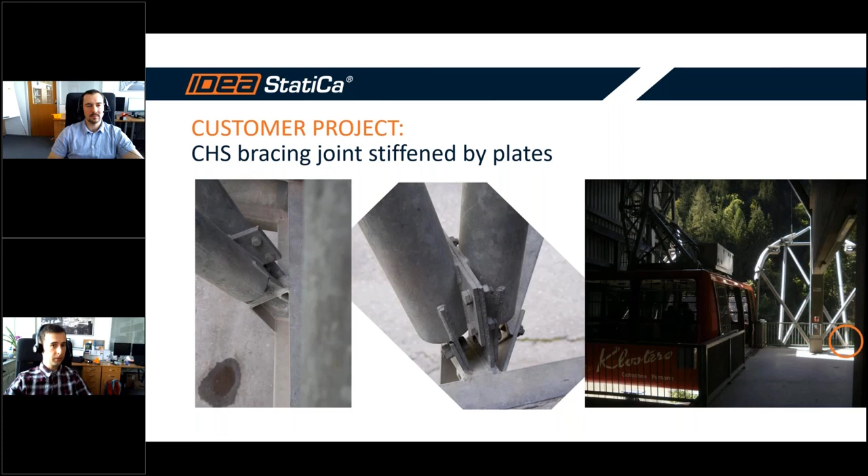Today we prepared for you a really nice example which we found in magnificent Switzerland in a really nice cable car, and it's a circular hollow section joint bracing, and it's really nicely stiffened by the end plates, and it's welded to a really small bracket, and we will go through this joint from scratch in the first part of the webinar. And in the second part, my colleague David will show you two HelpDesk highlights.

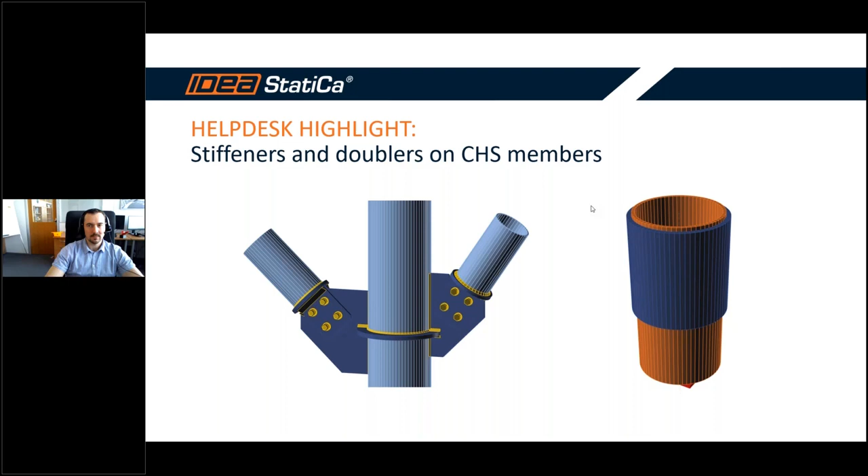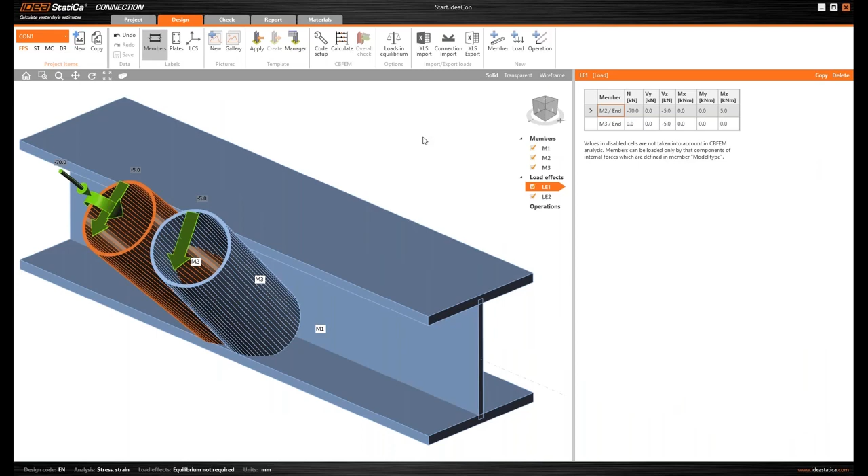So let's jump right into the real example. Let's say we prepared this structure in some finite element analysis tool, and we load it in IDEA StatiCa Connection. So this is our new project. We have members, we have load effects, and we can start the design.

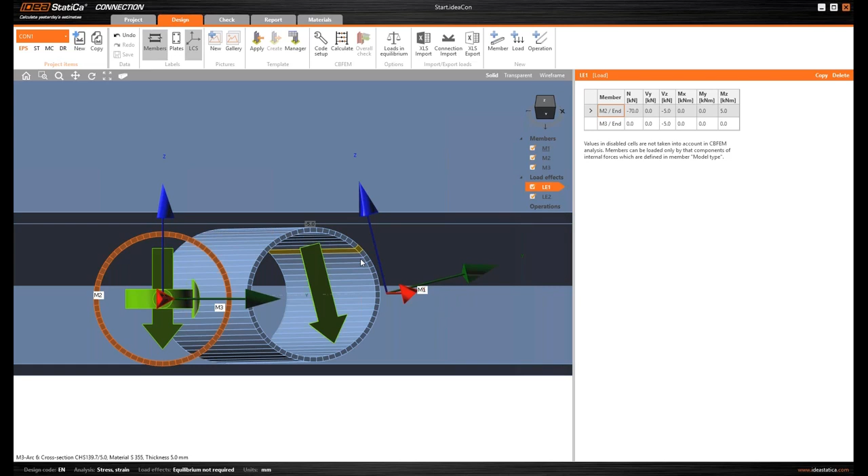For a start, I want to check out the local coordinate system because there is just a small issue. You can see that there are no matches for local coordinate systems of these two pipes. So the first thing I will do is to check out the position of the member M3, and I will just rotate it in a way that my local coordinate systems will be matched. It will make my design easier for the future, and it will also affect the load effects. They are now in one direction.

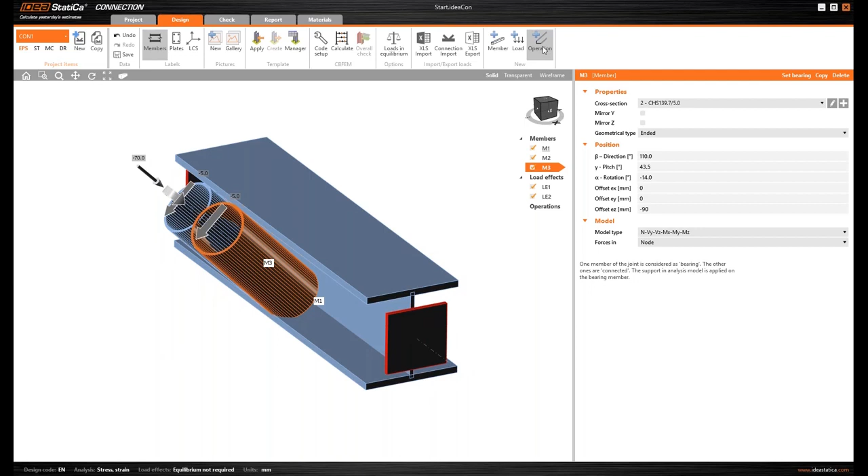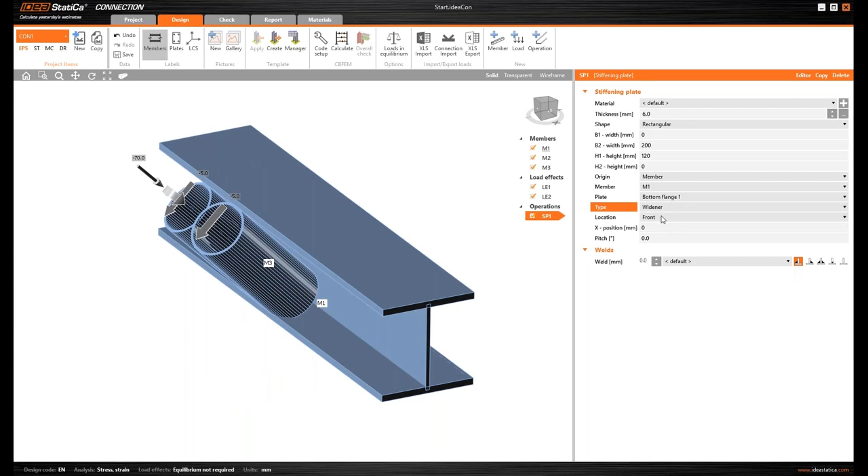So let's start with the design. As you saw from the picture, there is a small bracket which will hold these two pipes, this bracing, and we will create it from general plates. I will start with a small general plate. It will be a thin one, only 6 millimeters, and I will set it to member M1 to the bottom flange. It will be a widener, not a doubler, and if I turn on the transparent view, it's already here.

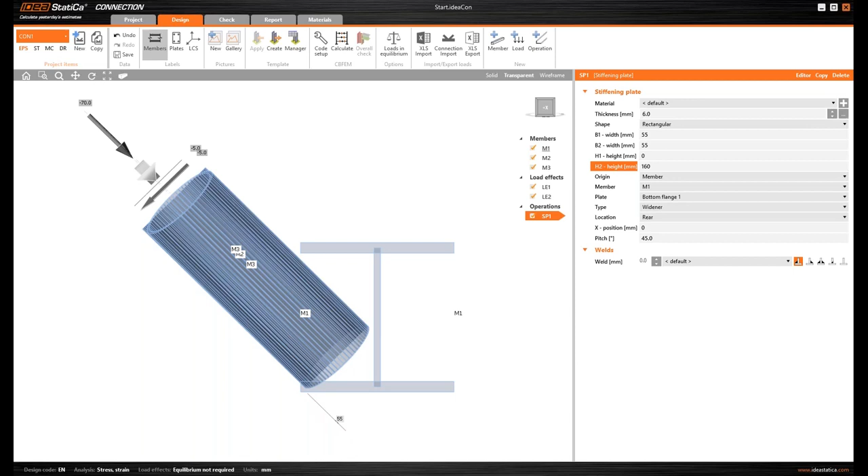Now I will only angle it to the right direction and change the dimensions. It will be here, 0 and 160. And you can see that we started the right way because the alignment is okay. And for now, I will turn off these two pipes just to see the whole work better.

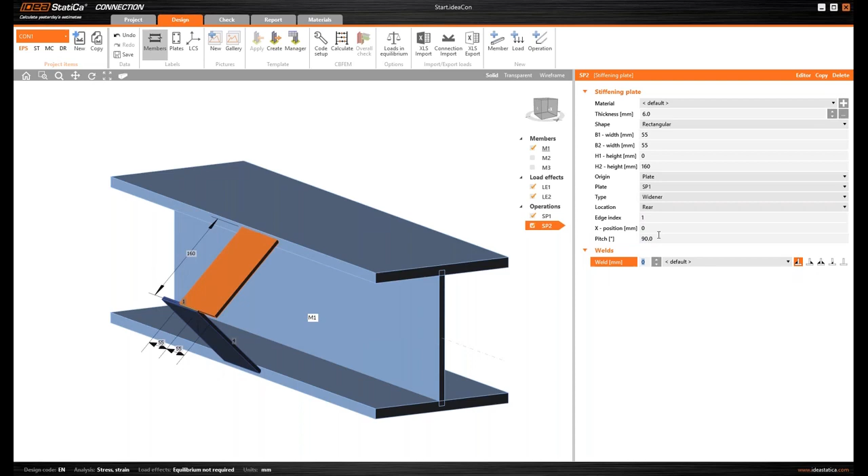Let's continue. I will copy it and assign it to a different plate. It will be not a rib but a widener, and again I will just change the angle, and you can see that I need to shift it to the left, so I will change this position 55 millimeters. Right now we are missing a weld here, so let's add a new weld. Edge to edge will be useful for this, and we will add it to this plate, edge number 1, and to the member M1 top flange, edge number 4, and right here we have it, the yellow one.

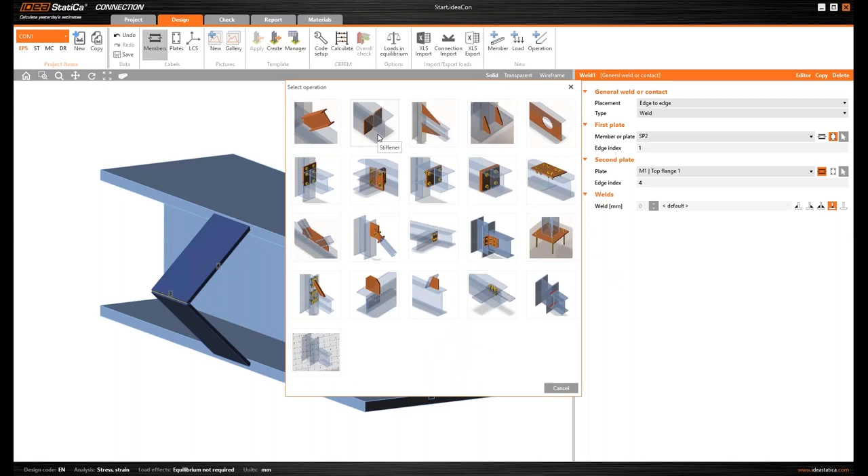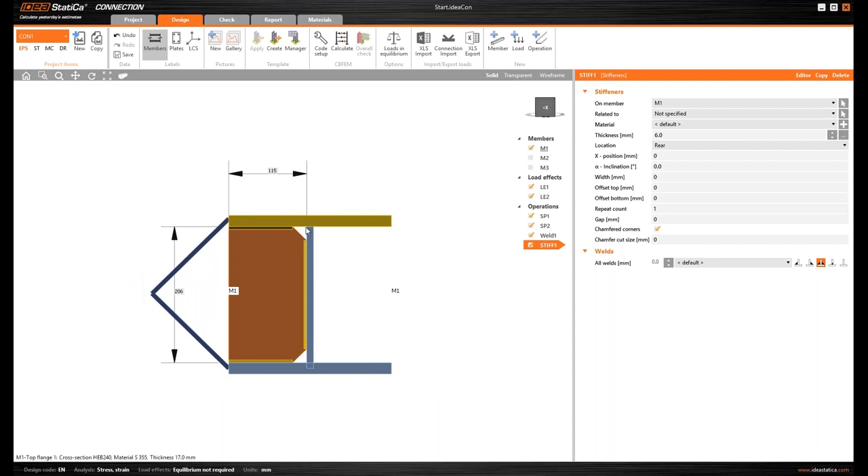So next thing, we want to add a stiffener to the main beam, and the stiffener will be only 6 millimeters thick, and it will be on the rear side. How do you think we can adjust the shape in an easy way? Yes, we can add a general stiffening plate and then cut it from all sides, but I think I can show you a little bit easier way.

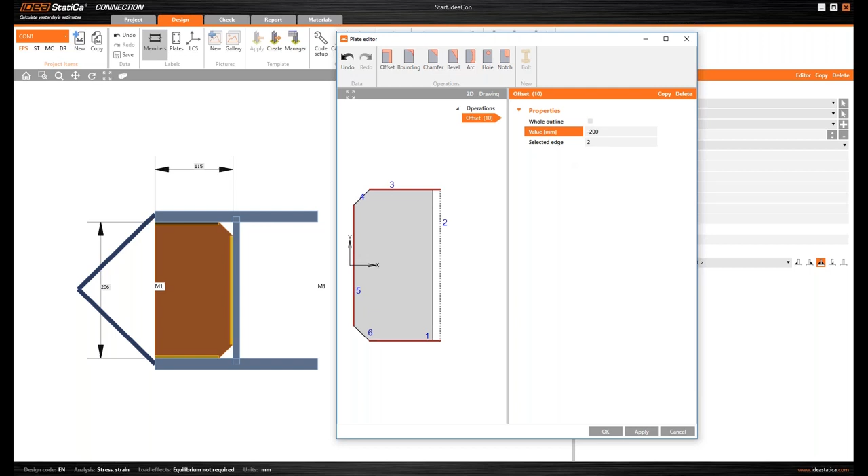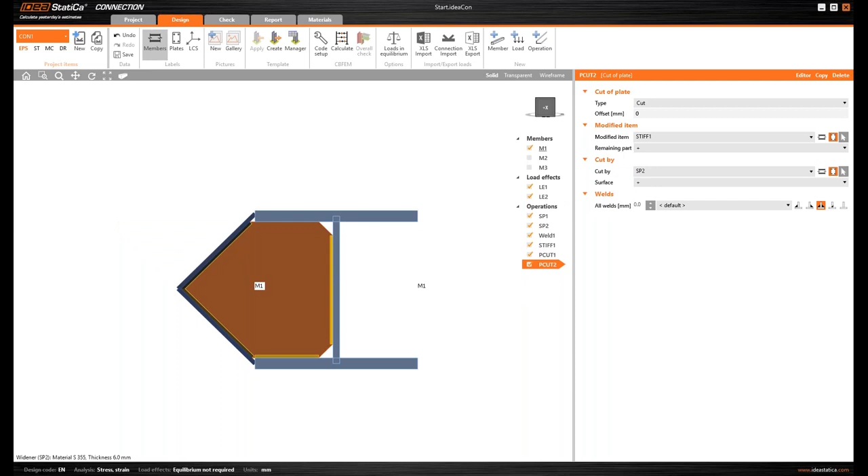Let's go to the editor and change the offset of the plate, but not the whole outline, only one edge, edge number 2. And if we type in a negative offset, we will in fact increase the size. So that's a really nice thing, because we can add material and then just cut it. It will be quick. Great. And just copy this cut and assign it to a different plate. And right now you can see we have almost finished with our bracket.

There is only one weld missing, so just add it again. It will be edge to surface and a different plate, edge number 4, and member M1 top flange. Great. And here we have it, all things together. So that is our bracket, and we can again turn on our bracing tubes. So now it's time to start designing the connecting plate for these two tubes.

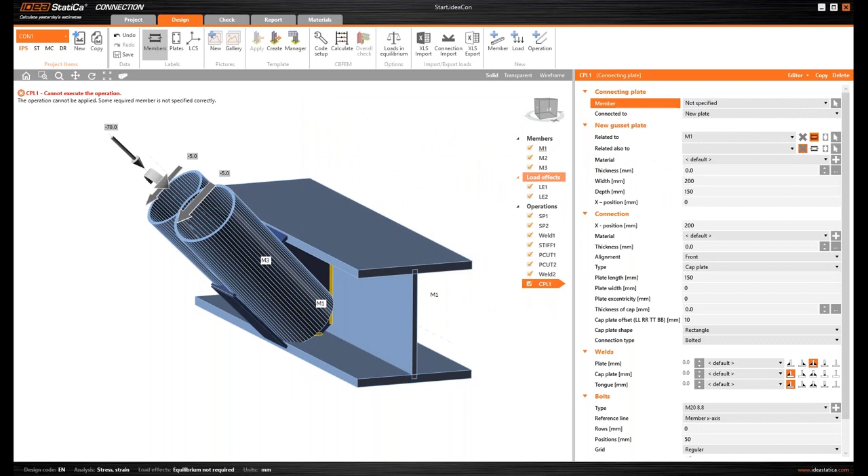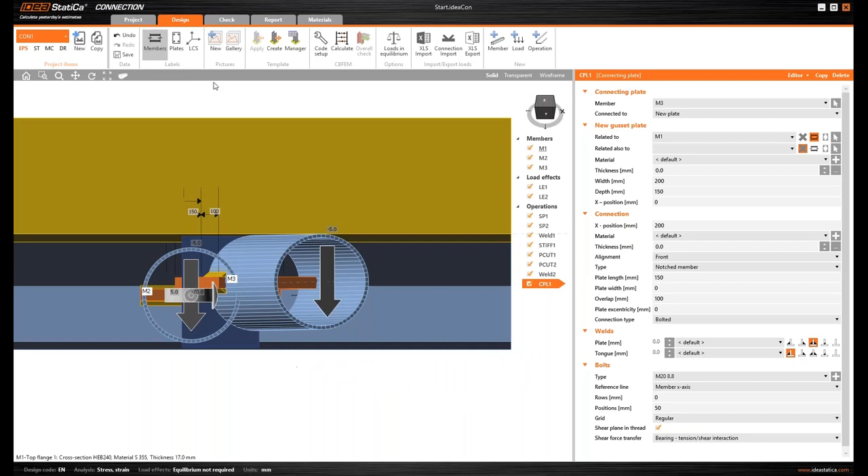So let's add it. Here we have the connecting plate, and we will assign it to member M3 for the start. And let me just change the type of the connecting plate, not to cap plate, but for notched member. That's better. We want to notch the member. And if I turn the view right, just like this, you can see that our connecting plate is aligned with this M1, because this beam M1 is related to this operation.

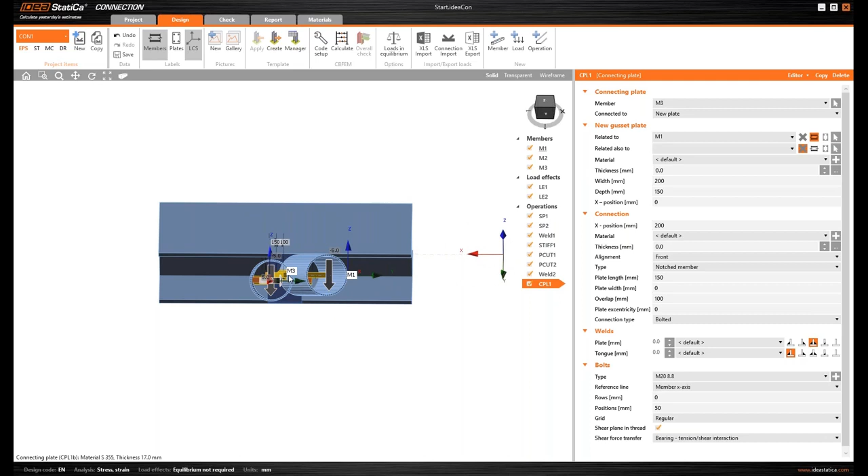And this one, our connecting plate, is aligned with the longitudinal axis of the related beam M1. But I want to change the angle of this connecting plate, and I don't have an option for that here in the parameters. How can I do that? Just easily, I will turn off the relation for member M1.

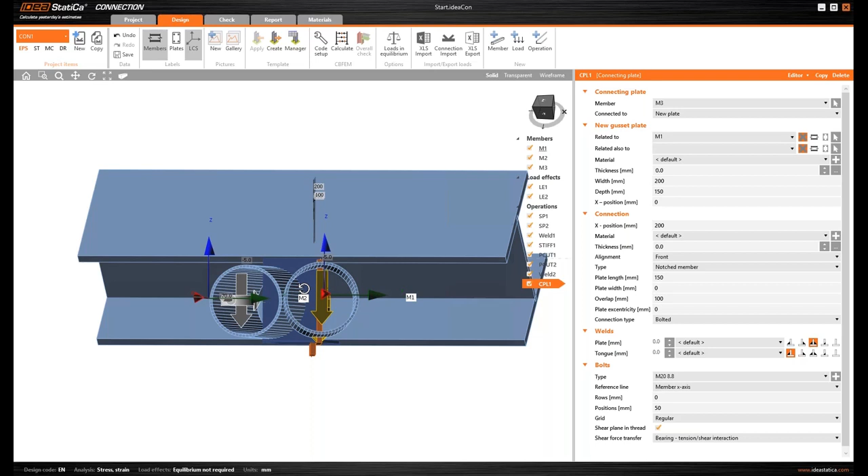Check it out. By turning this off, only one thing remained as a parameter here, M3, the main beam, and you can see that the connecting plate is aligned to one of these axes, which is great. In this position, we wanted to have it. So that's great. Let's turn off the local coordinate systems, and we can proceed with the definition.

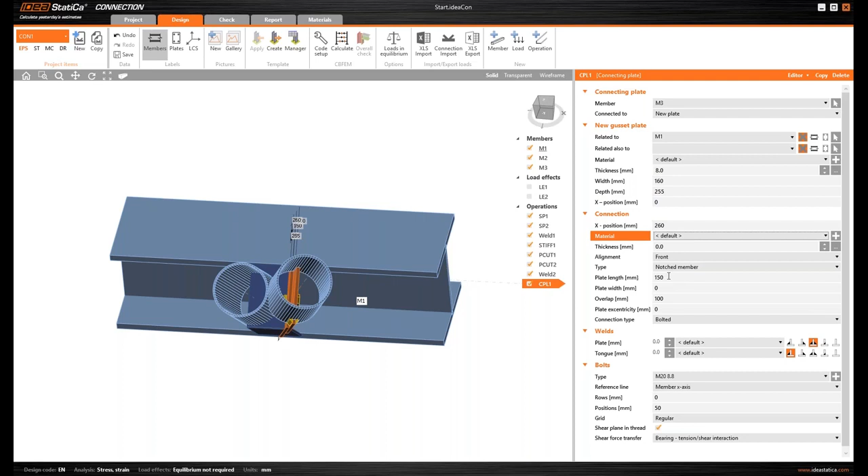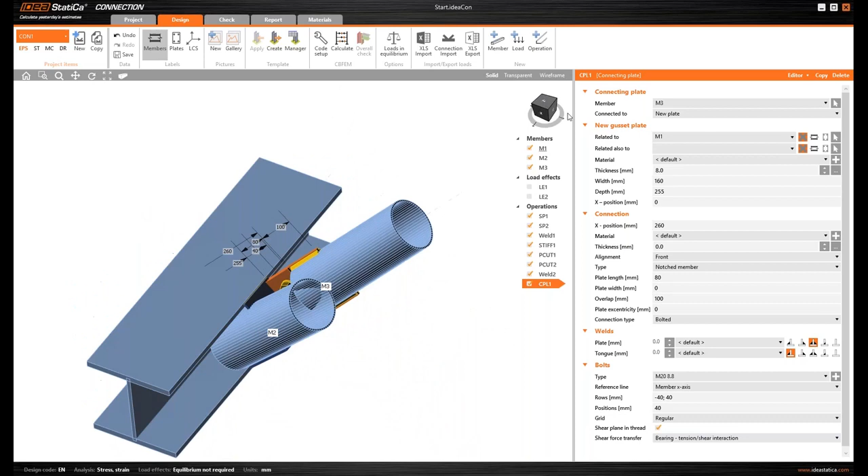It will be 8 millimeters thick, and I will change the dimensions a little bit. Sorry, there will be a semicolon. Great. And you can see I created a really nice connecting plate. So let's copy it and assign it to the other tube.

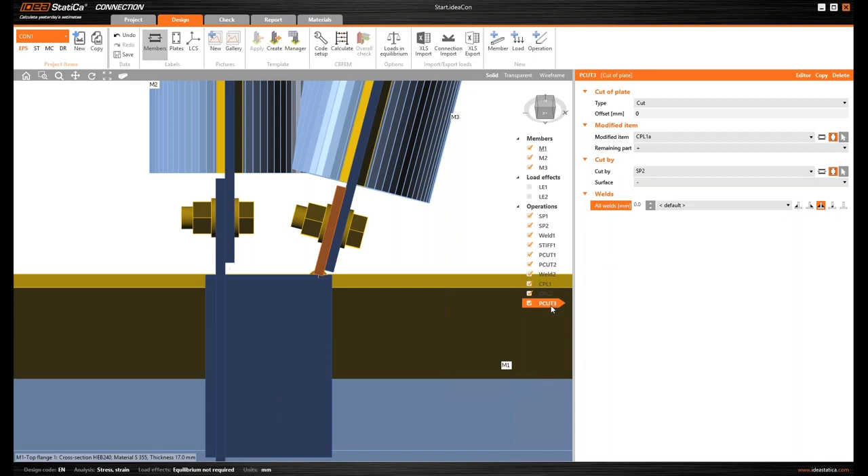And that's it. The only thing that is left is to cut these two plates to connect them. Just one cut, this plate with this plate, and I will change the remaining part. Okay, copy this operation and change the assigned plate. Great. Now I connected it.

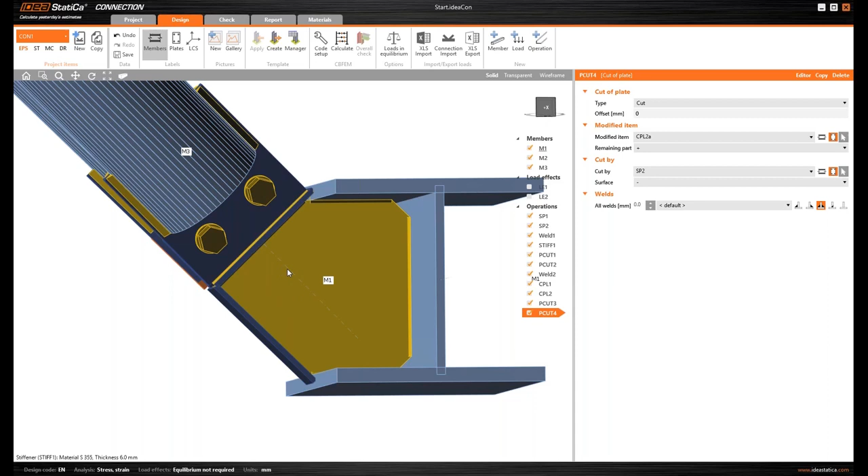And from my engineering point of view, if I push these members down, it will definitely make this stiffener buckle. So I want to insert here a small stiffener too along this axis. So let's start. I will add another operation, another stiffening plate, and it will be only 6 millimeters thick. And I will place it to plate SP2, which is this one.

And it will be a rib, it will be to rear, and it's creating on the other side. So just rotating the view, and I need to shift it a little bit, let's say minus 120 millimeters, and adjust the dimensions a little bit. That's great. Let's cut it again.

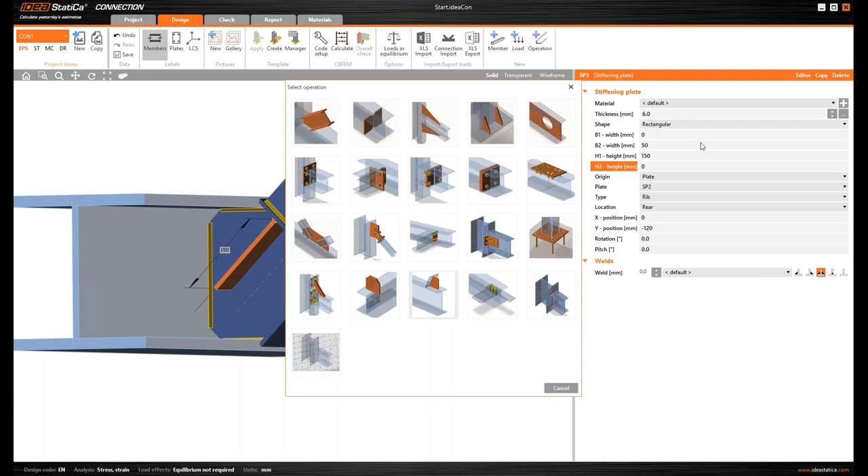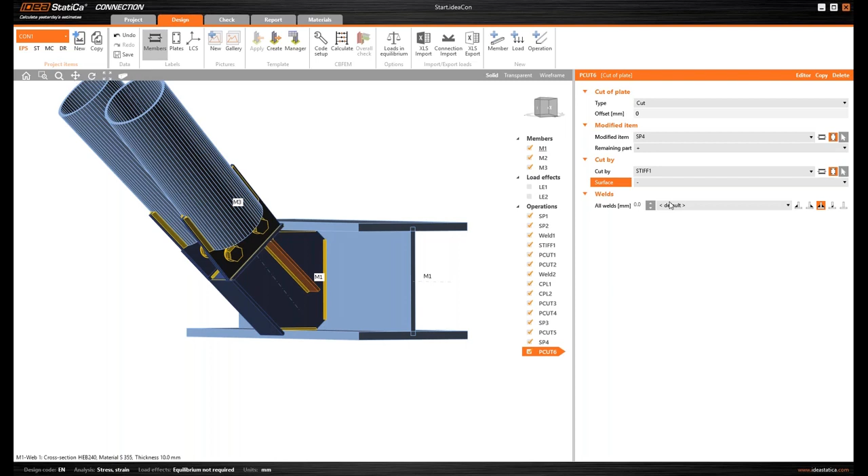By cutting the thing, you will change the size, and you will add a weld, which is handy because you will do two things in one push. And I will copy this again and change it to the other side and cut it again. And that's the way I want it. That's great. I can turn on all load effects, and I'm finished with designing my joint.

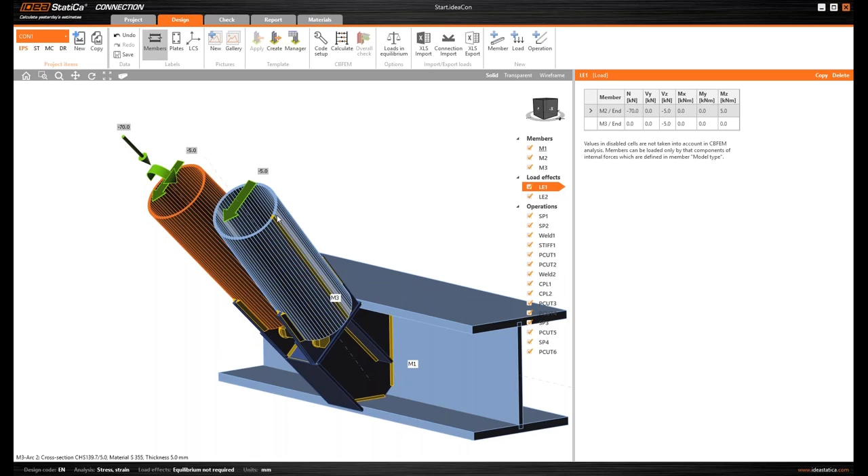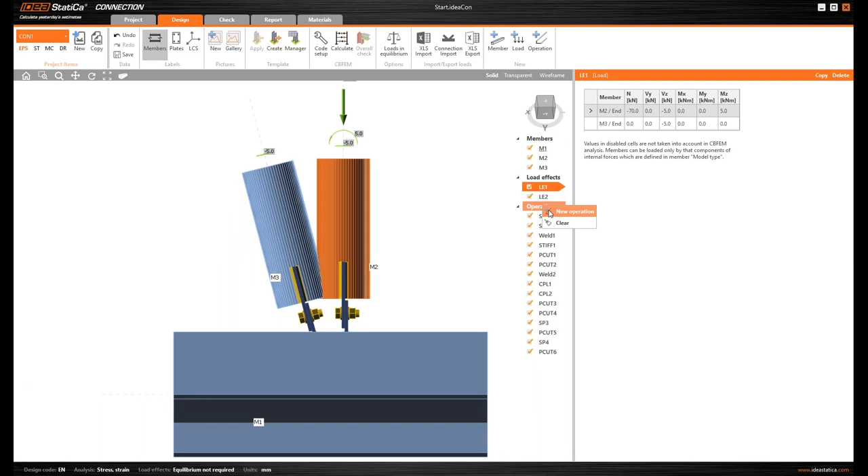And that's great. So one more hint before we start the calculation or the analysis. We have really nice tubes here, both of them. Both of them are divided into quite a lot of arcs. This is the default setting, but, oh sorry, I forgot the plates here. So we have to add plates here and bolt them together. So that's another 2 plates more. So let me just add it.

I will increase the size so we can see where the plate is and we can move it around. Now I will rotate it clockwise, just in one direction. And in the other direction, I will rotate it again, counterclockwise, like this. 85 degrees, nice.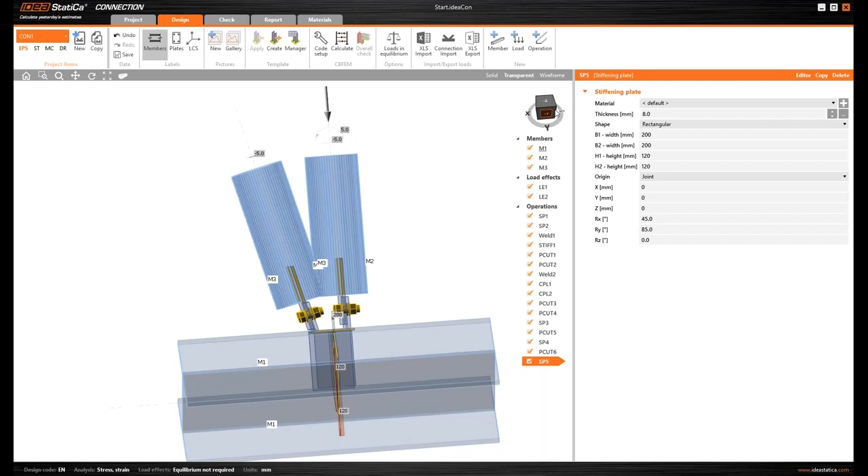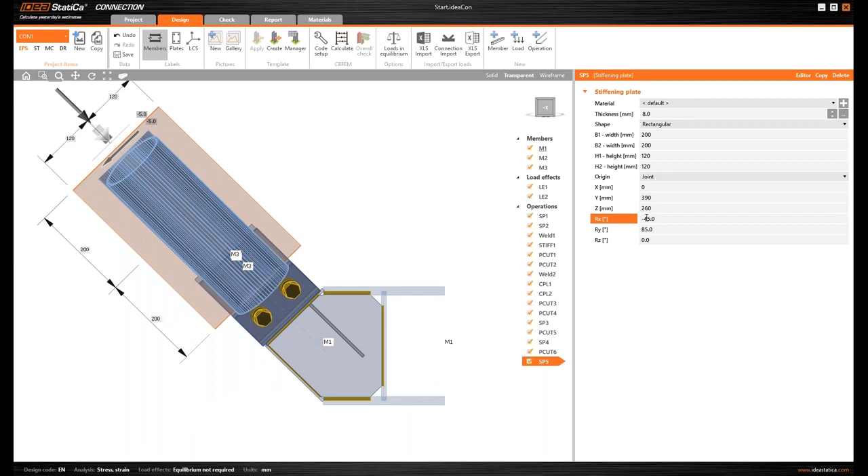And now I will move it to the left and up. So to the left and up. And I have here a small fault. Great, minus 45 degrees. And if I change the view from the top side, you can see that we have this plate almost right in the position in the middle of these tubes. So I will move it a little bit to the left, only about 33 millimeters. And that's great.

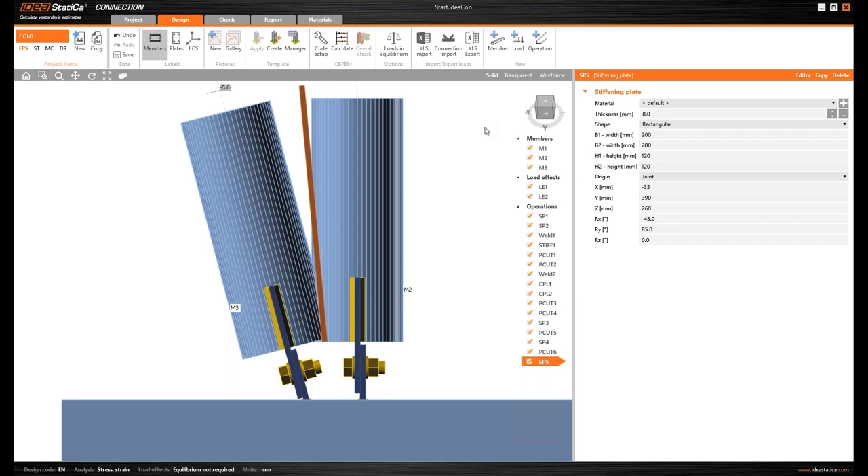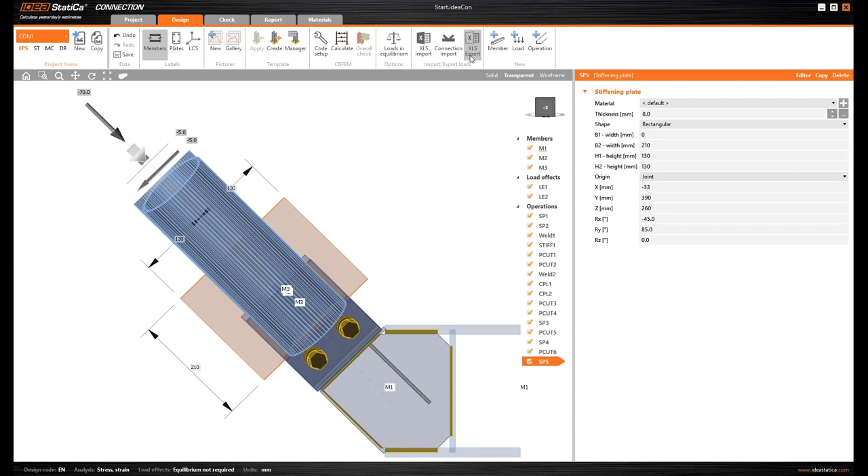Now I will only adjust the position a little bit, so the dimensions. And if I change the view from the side, it will be 0 to 130. Great. And here we have one of our end plates, and I will just make a copy and assign it to this plate, and it will be a doubler. It will be a doubler without a weld, and it will be on the rear side.

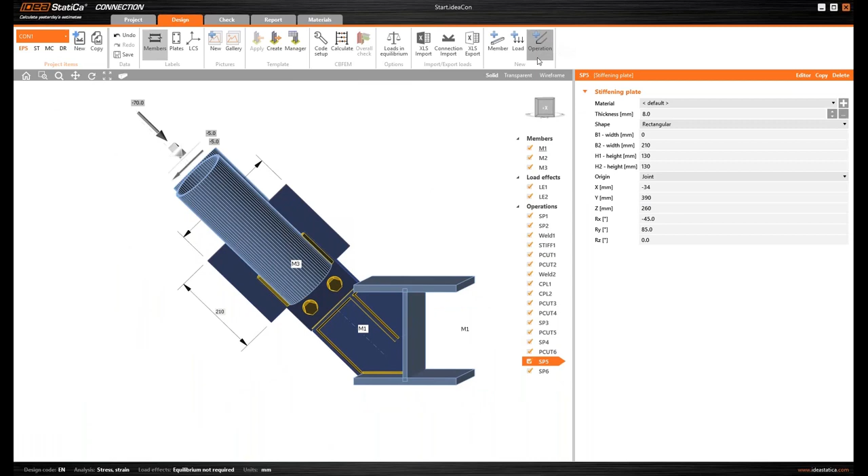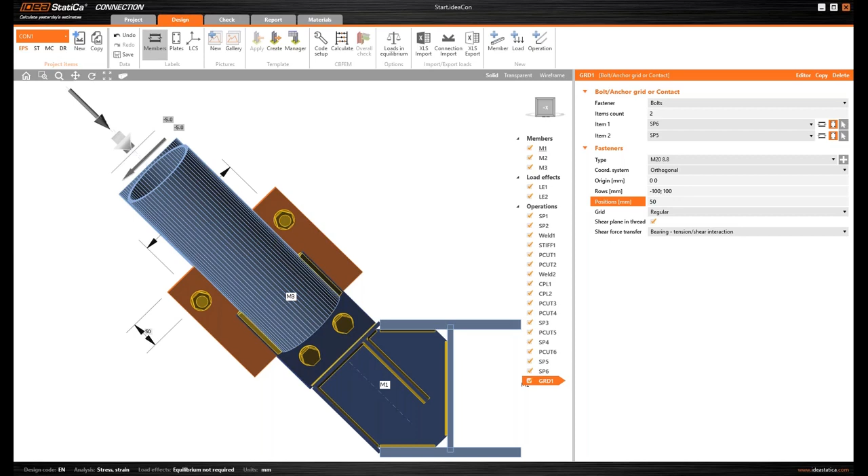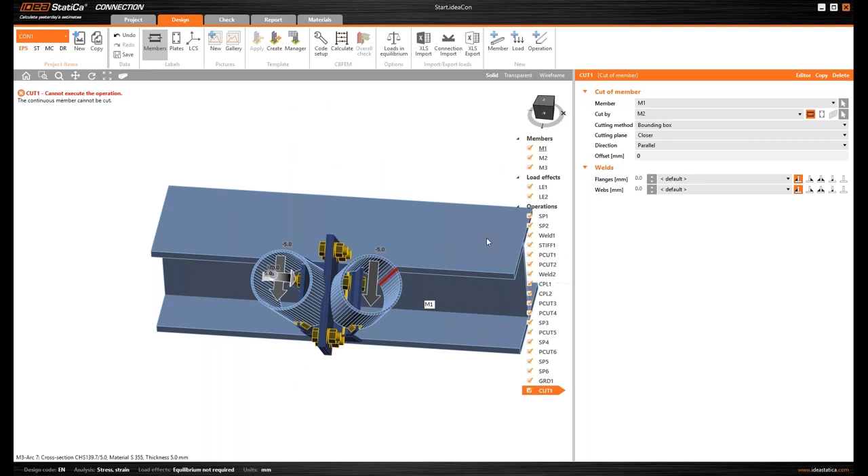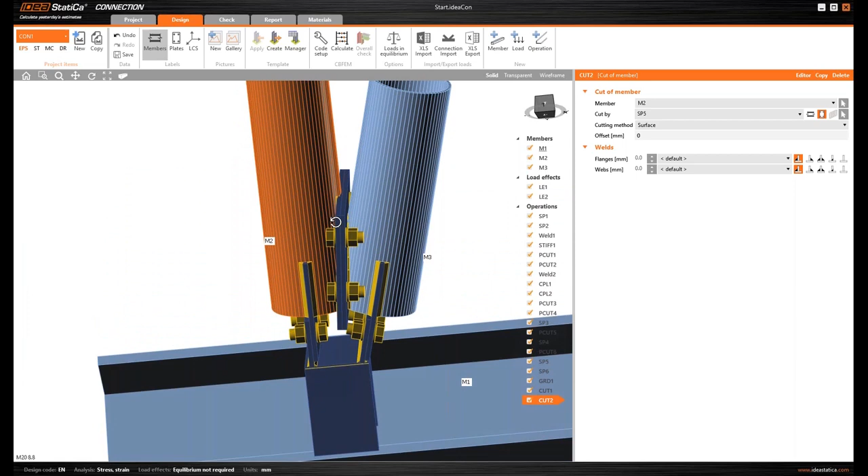And now the last thing, we have to cut our tubes here and here to weld them together with the plates. So cut of the member is handy for this, and we will cut member M2 by this plate, but not by bounding box, but by surface. And I will copy this manufacturing operation and assign it to a different member and different plate. That's great. And now it's done.

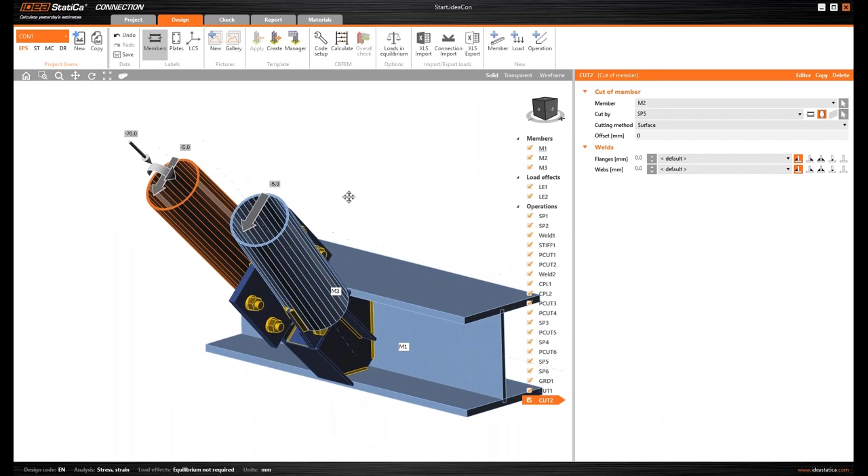And I talked about the division of the arcs. So once again, we have here quite a nice division of the arcs. There are a lot of them, but we don't have any intersection of the tubes together. So if you don't have any intersection of the circular hollow sections, you can change the division of surface of the biggest circular hollow member to a smaller value, for example 32, which will help to speed up your analysis and save you some time in calculation. So I will turn it on.

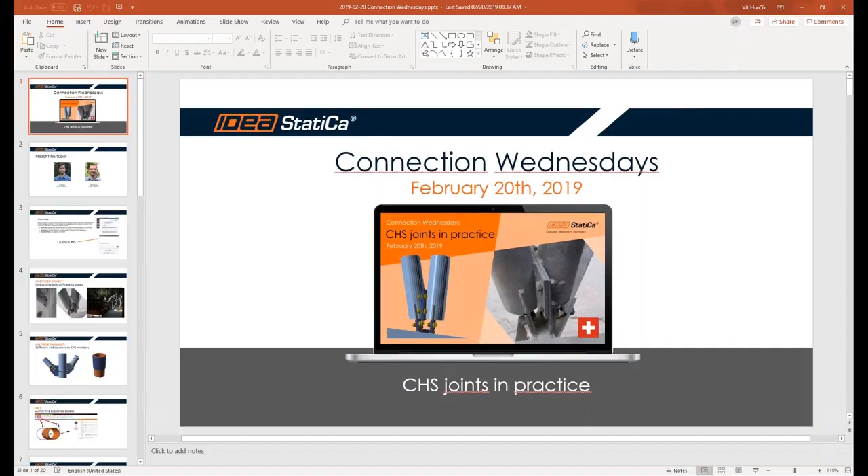Great. Thank you for your answers. Almost 60% voted. I will wait a couple more seconds. Okay, so I'm closing the poll, and there is a result. The middle one was right. Yes, of course, it will affect the manufacturing operations and load effects too. So B is correct.

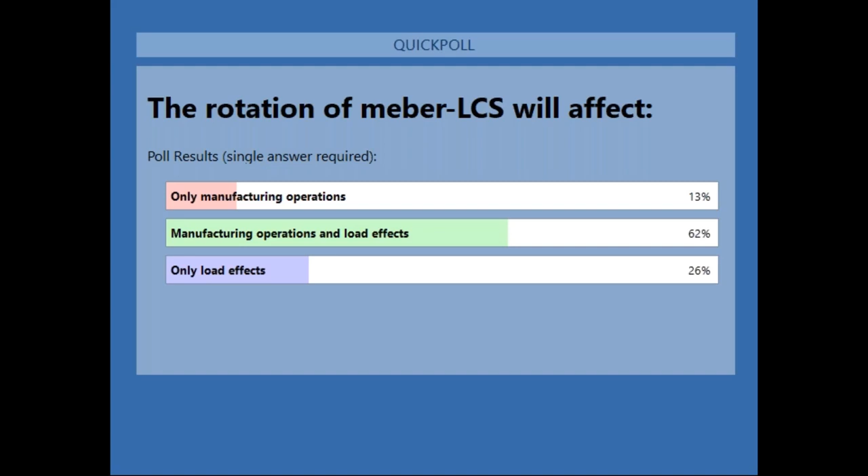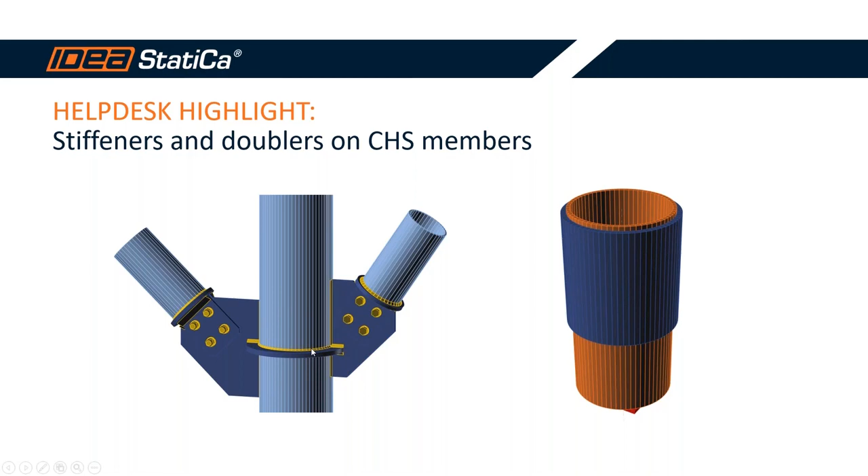In this part of our presentation, we would like to show you how to model stiffeners and doublers on circular hollow section members. Let's start with stiffeners. We can switch into the model in IDEA StatiCa. This model is unfinished, and we can move on.

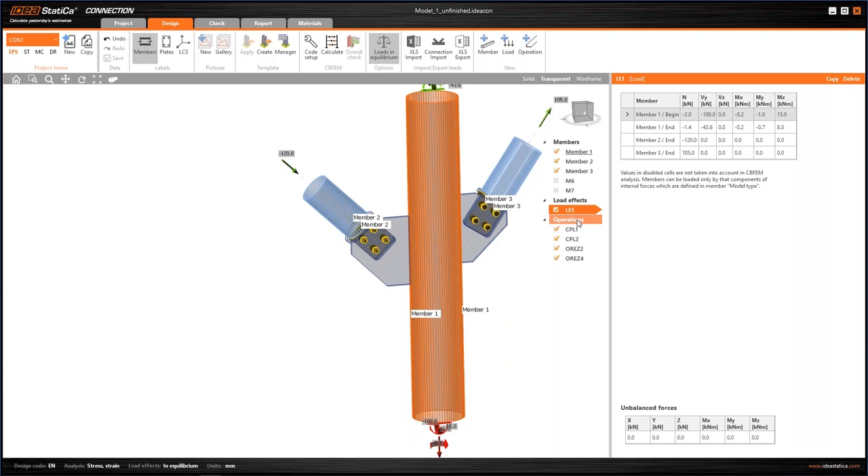In the first step, let's add an inside stiffener. How to do that? We add a new operation by right mouse click. Let's add a new operation, and it's stiffener, this one. The operation was added, and we have to set an inside stiffener. So how to do that? Here is the trick. We have to switch the shape from circle to profile. And now you can see that the inside stiffener was inserted.

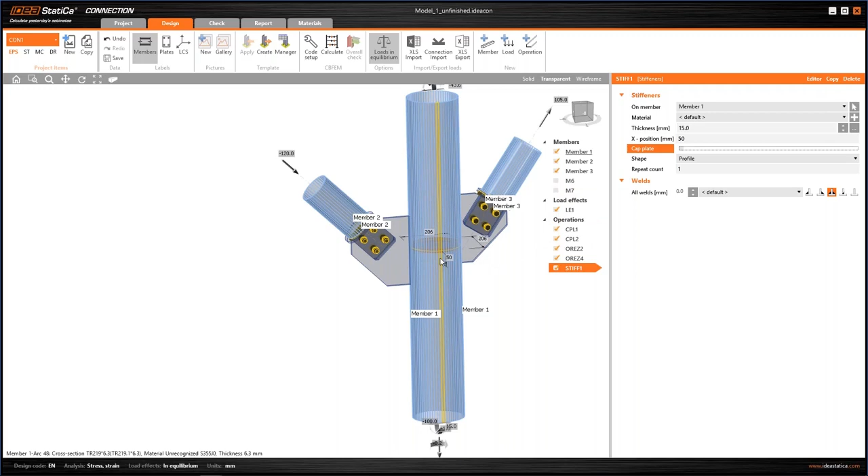Now we adjust the proper values for this operation, thickness and location. And that's it. We have an inside stiffener very quickly. Let's proceed and add an outside stiffener. We will use the same operation, stiffener, but this time we leave it as it is. Shape will be circle. We only set the appropriate diameter and it's there. And of course we shift it a little bit to the position and set the thickness.

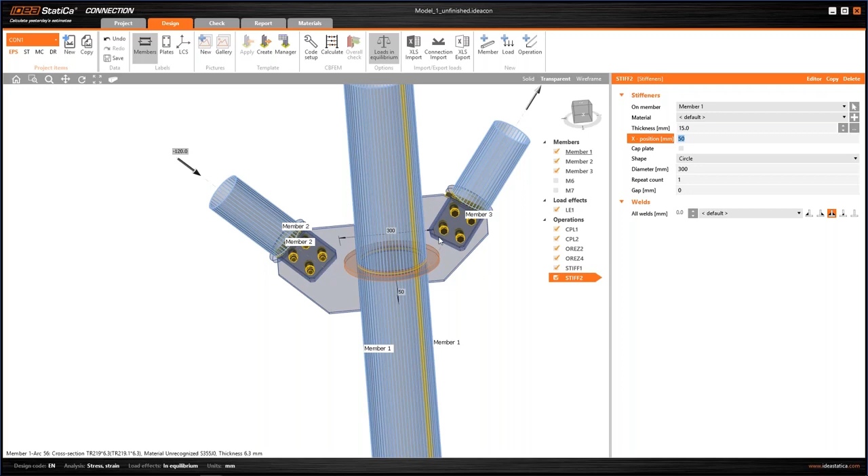And it's there. I can switch to solid view so you can see the whole connection. Just now we inserted two operations, inside stiffener and outside stiffener. And now I would like to complete my connection. We want to connect this plate with the outside stiffener.

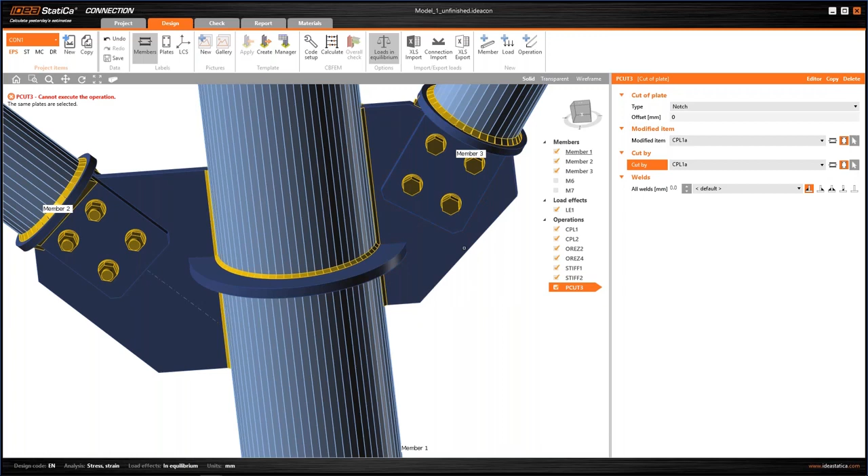To complete our connection, let's add a new operation. It's a cut of plate. And we have to select the type of cut. Now it will be notch. And we only choose the modified item. And this modified item will be cut by the outside stiffener, and we switch to double-sided welds. And that's it. The notch was added.

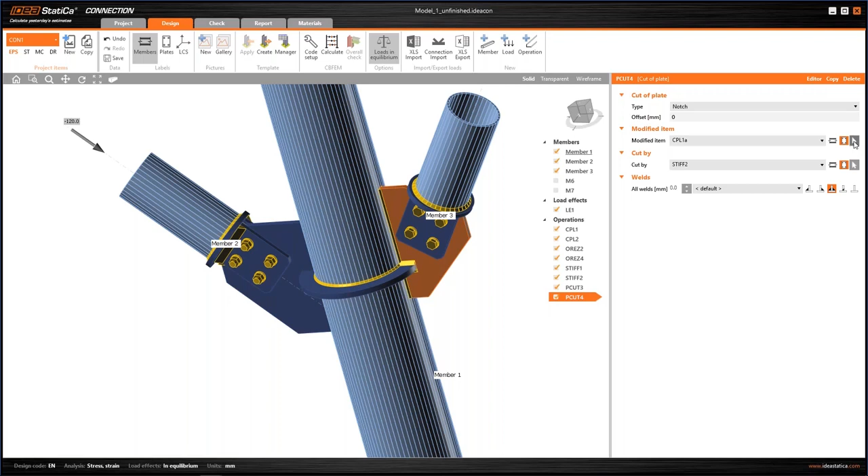And the same on the opposite side. We want to do the same operation. So let's copy this operation and switch the plate on the opposite side. And that's it. Our connection has a final design and we can run the calculation. Meantime, we can skip back into the presentation.

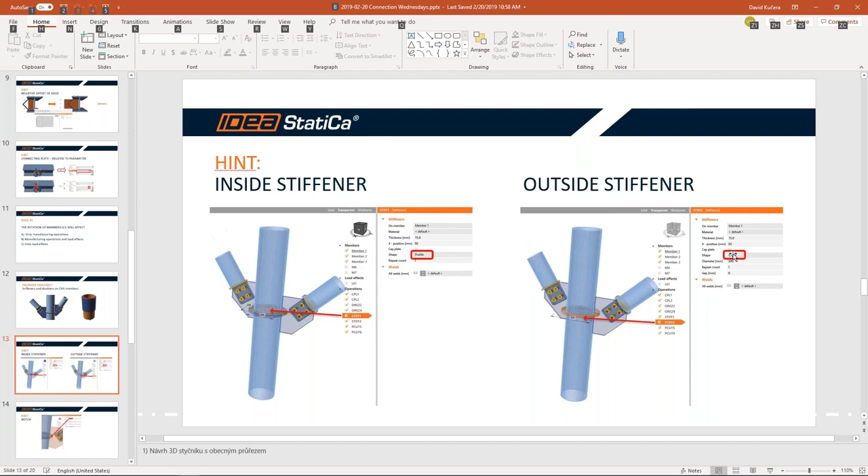So here it is important to summarize three things. If you want to make an inside stiffener, here is the trick: the shape in operation stiffener must be selected as profile. If you want an outside stiffener, you can leave it as circle. And if you want to create a notch, it's hidden in operation cut of plate, and you will select the type of cut as notch. And that's it.

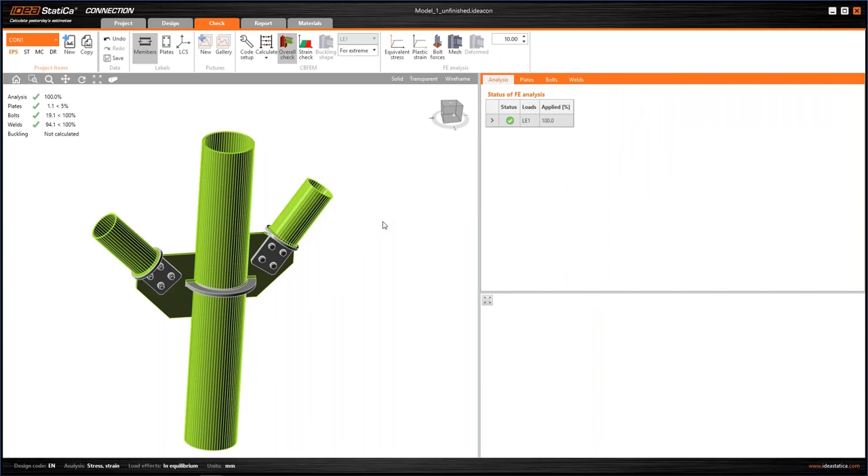Just now IDEA is still calculating, it's performing iterations, but in a few seconds we will receive results. So now it's there. And as you are used to, on the left side of the screen, you can see a summary of the results, and now you can investigate whatever you want in this connection. Do you need stress? So you can display stress.

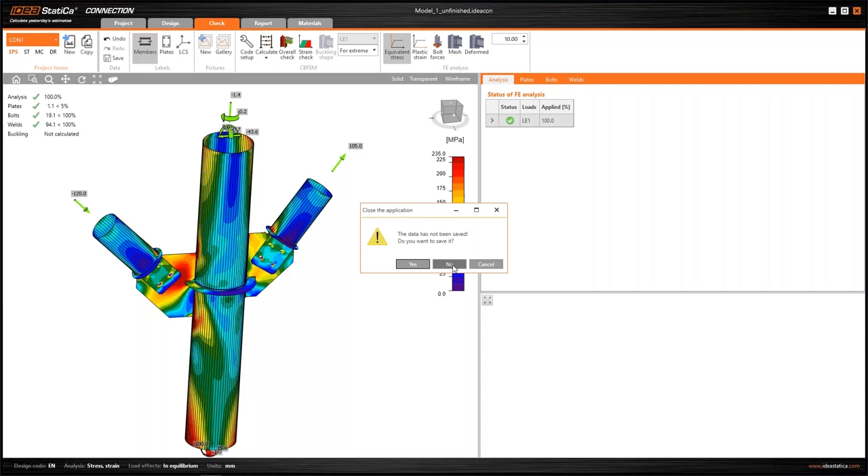Or strain, whatever you need, or you can directly print a report. But we will not do that. So for now, I can close this first example, and we can proceed to the second example.

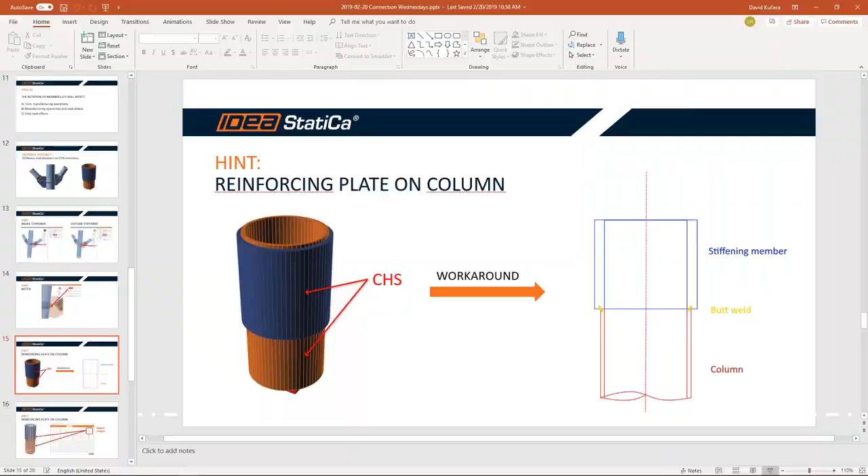It was a question from one of our customers. He had two tubes, and he wanted to cover one tube partly by the other tube. Unfortunately, directly it's not possible, but we found a workaround. First of all, we have to create the bottom part of this connection as an ordinary member, so it will create our column. The second part will be created as a stiffening member. And between these two parts, we will apply butt welds.

So let's skip again into the model. This model is unfinished. We have the bottom part of the connection, and now we need to add the second part of the connection. Let's add a new operation. This time, it will be stiffening member.

Let's adjust right position for this member. Let's rotate it a little bit and set the length of the stiffening member. So you can leave it as it is, and this one we can change.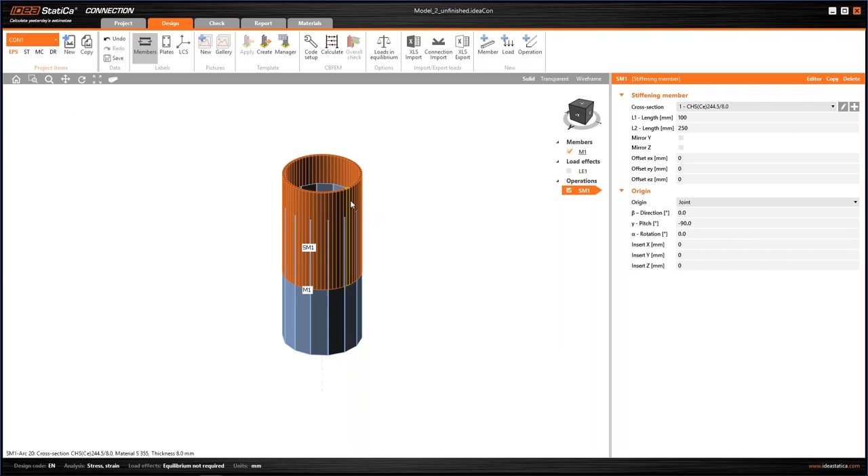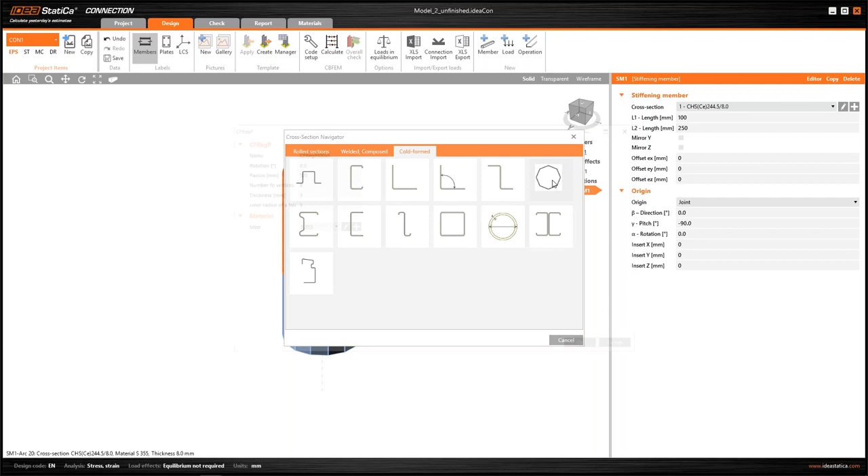We will change the cross section for the stiffening member. Let's add a new cross section, and now we will use a regular polygon, and that's the magic in this example, because we cannot connect directly to circular hollow sections as members, but we can help ourselves with this kind of cross section. So let's set appropriate values for this cross section.

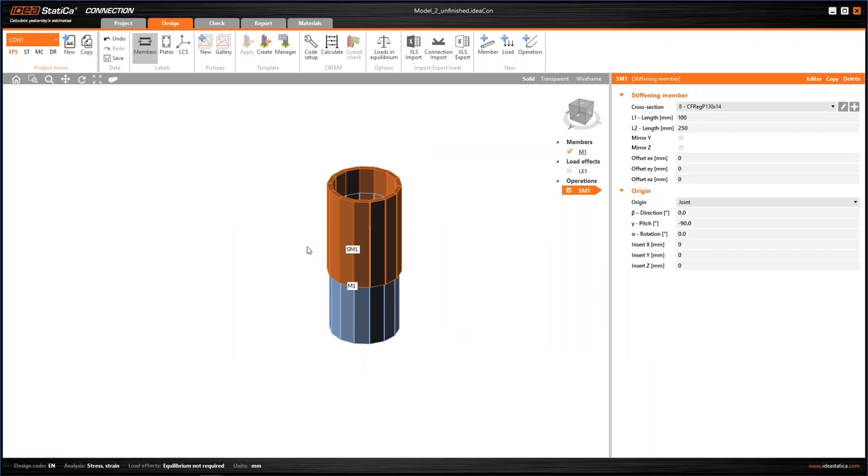And we can confirm. Now our cross section was created. To make it clear for you, now I will switch to transparent mode.

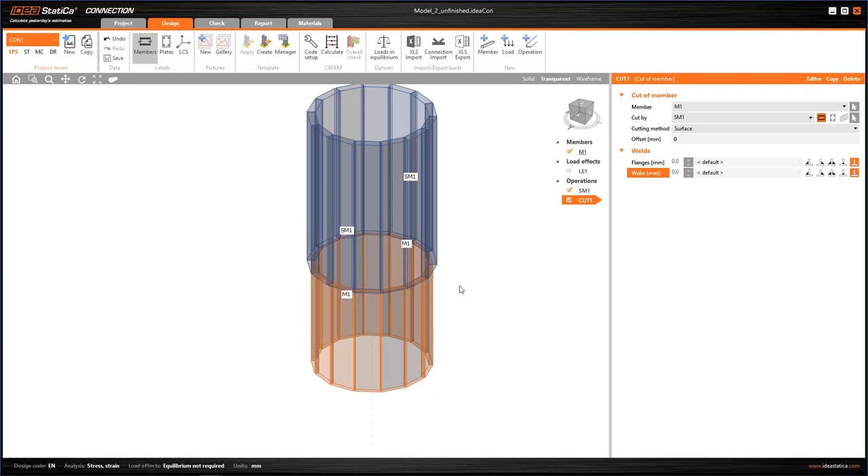Now I want to cut member 1 by stiffening member 1. Let's add new operation, cut. We want to cut member 1 by stiffening member 1, and the cutting method is by surface. And for this time, I will switch off the welds, because the welds will be added in the next operations.

So now our connection is almost done, and now I have to connect these small plates one by one, because circular hollow sections are created from small plates, these ones. So let's add new operation, weld, and now...

I have to switch to members because I have two members, and I want to connect member 1, web 1 with stiffening member 1, web 1, and nothing happened because all of the edges of the plates are numbered.

So I want to connect this part of the connection, so there is edge index 2. So let's do it, and you can see this was highlighted, the weld was highlighted.

So I can add for you the second weld, the same procedure, but now it's member 1, web 2 with stiffening member 1, web 2, and it's there. Of course, I will not do it one by one.

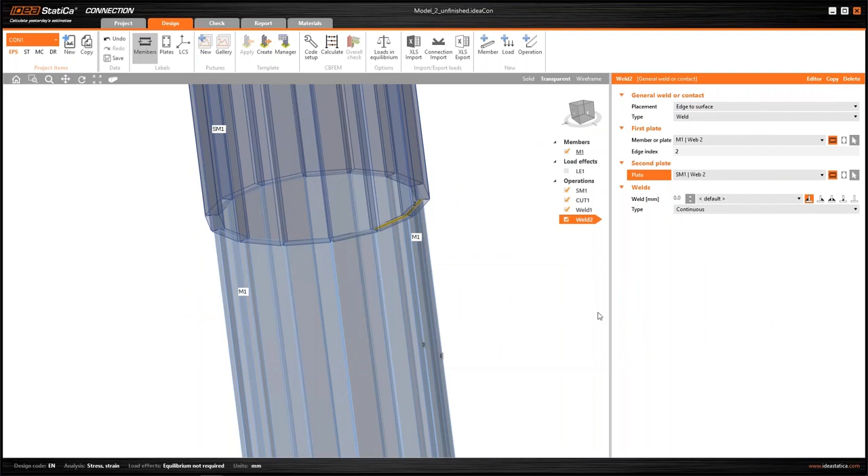I prepared for you the model before. So this model have been prepared for you. It's the same. You can notice stiffening member 1, cut 1. In the previous example, we added only 2 welds, weld 1 and weld 2, and the same workflow is for the other welds.

It means you have to connect these plates one by one, and that's all. And I finished the connection. I made for you some simple connection.

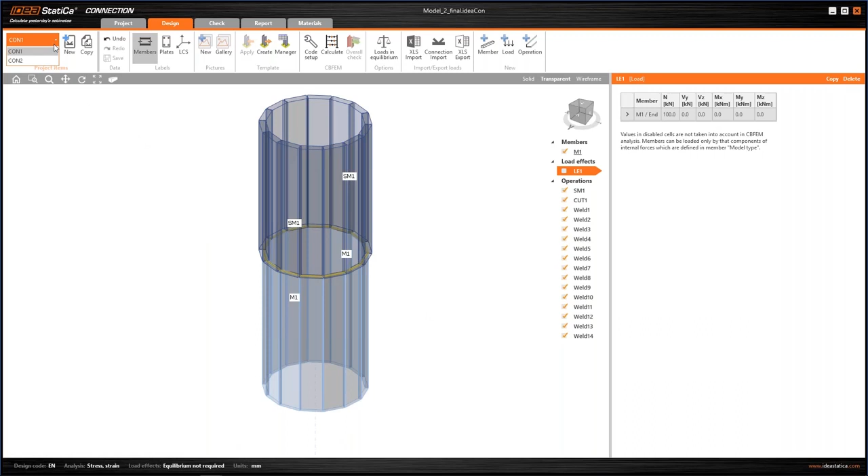I added the second or third member and I loaded it. And again, we received results and we can go through the stress, strain, mesh. Of course, you can change the inputs, or we can directly print the report.

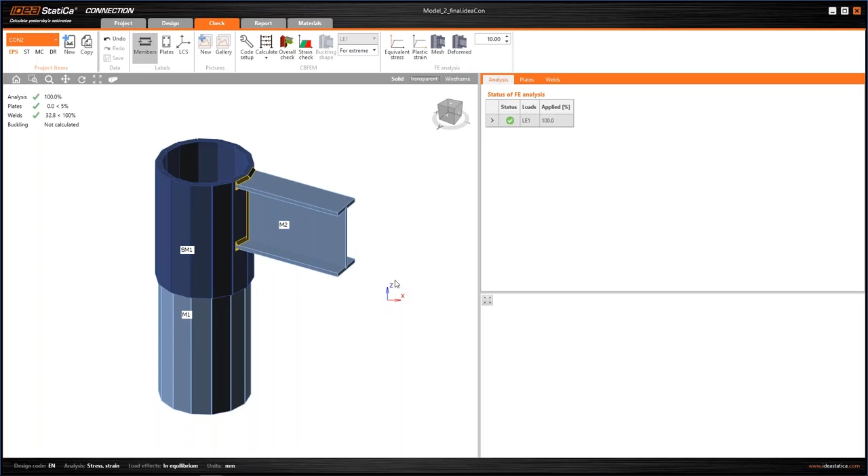So the main thing for this second example is to choose the cross-section for the stiffening member, and make it as a regular polygon. It's hidden in the cross-section navigator called cold-formed sections, and it's this one.

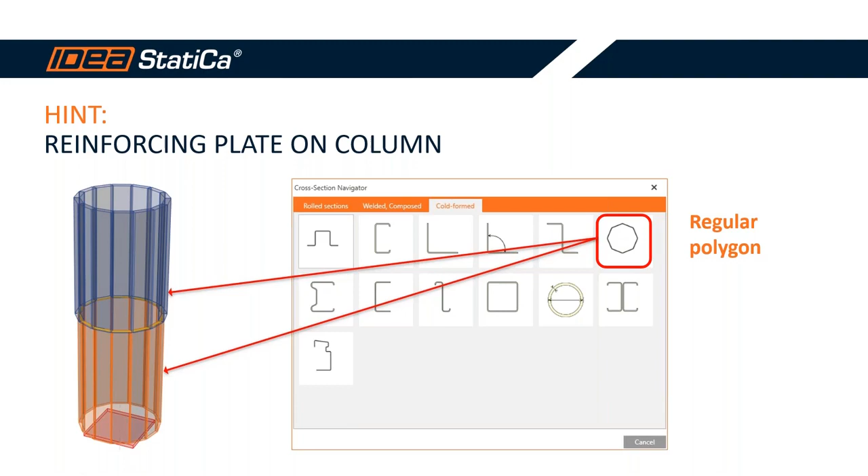Then decrease the division of surface of the circular hollow sections, but only when there is no intersection of these circular hollow sections. Be careful about this.

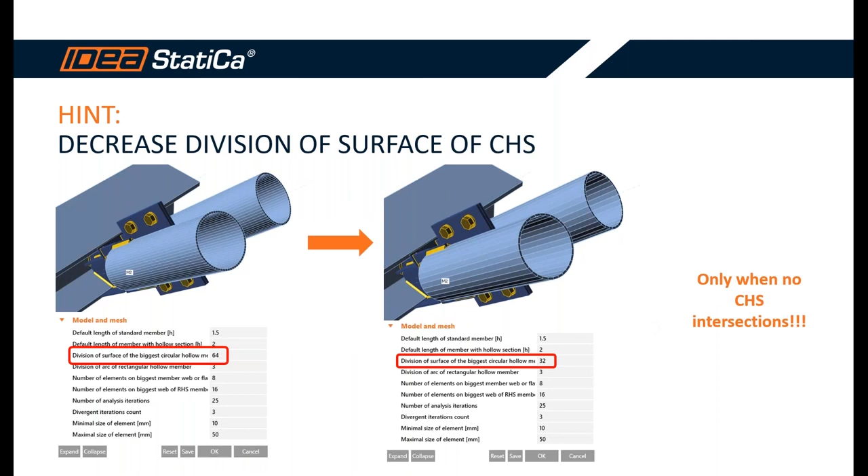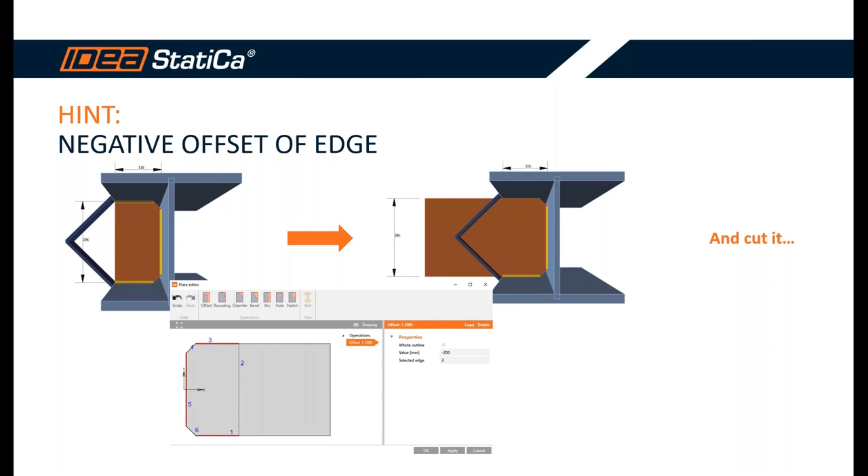And another one, there is a really nice feature. If you input the negative offset of one or more edges, you can actually add material and then easily cut it and adjust the shape. And the last thing, you can use all operations without the parameters, which will help you to design a different thing than usual.